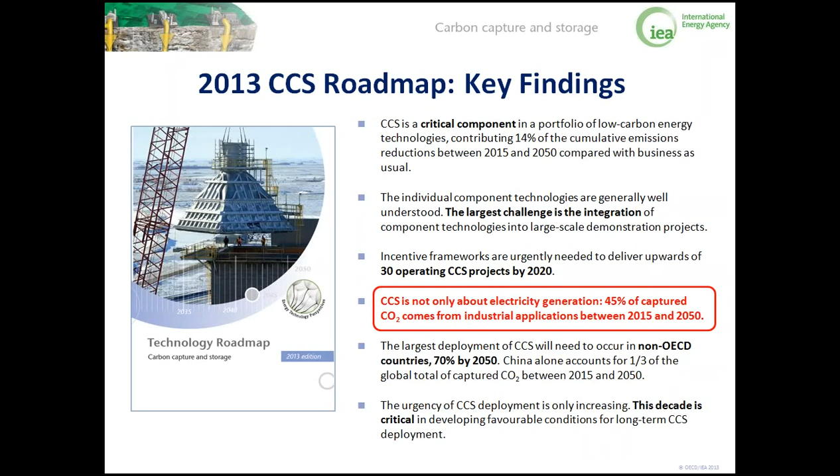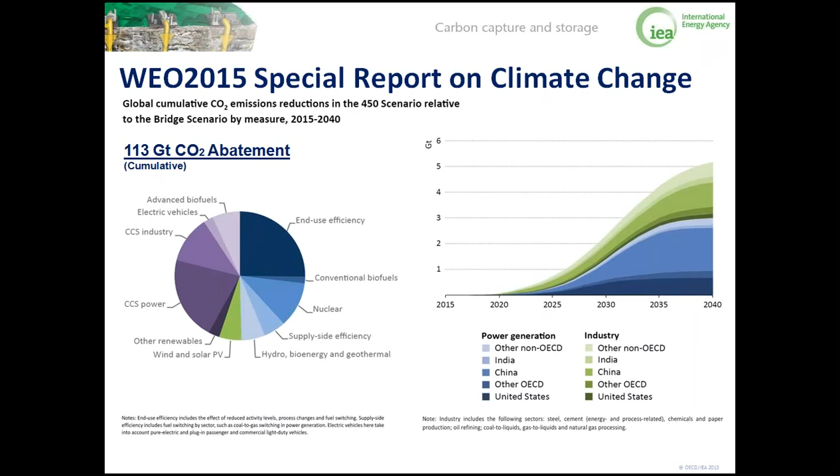Without the initiative of China, CCS in industry will not run for sure. We all know that in the steel industry, the cement industry, or the oil refining sector, China accounts for between 40 to 50 or even 60% of the total capacity in these areas. So this slide clearly highlights the important role of CCS in developing countries.

To achieve the 450 ppm scenario by 2050 and beyond, there are currently no alternatives to reach the same level of emission reduction as what CCS could do. There is a limitation to fuel switching, and a limitation for energy efficiency measures. The lack of CCS would probably lead to other sectors carrying the burden.

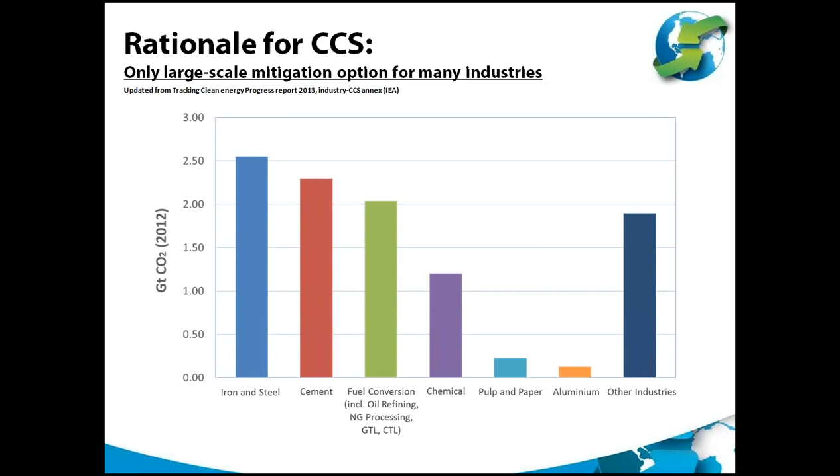I would like to present some of the key results of the steel industry. Then I will follow this up with an overview of the results of the hydrogen production industrial application.

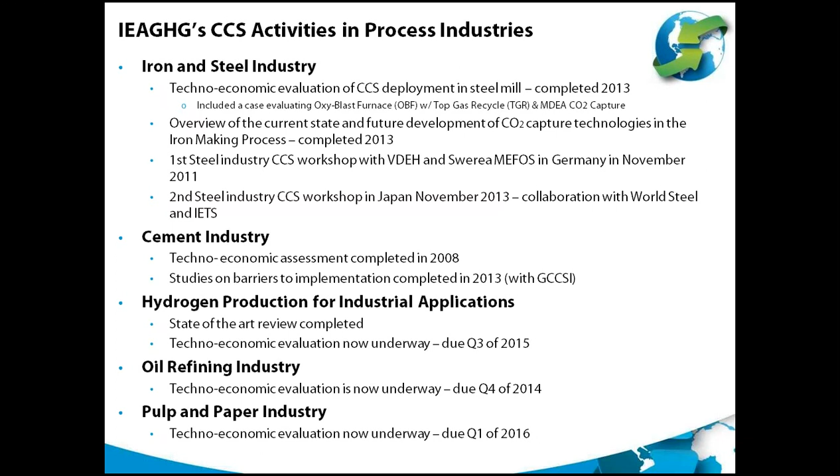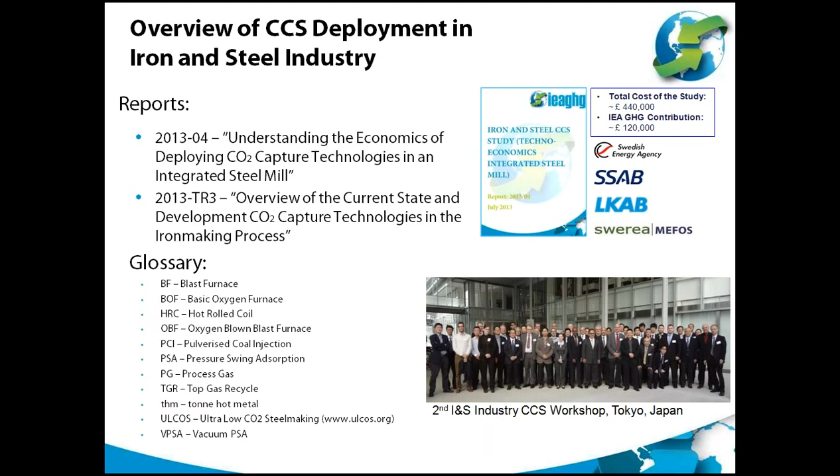You can also see in this slide the different lists of glossaries or lists of abbreviations that I use in this presentation.

This is an example of an integrated steel mill. This is not the same production steel route that we see in Emirates Steel, where the first CCS deployment in the steel industry will be operational by 2016. So I would like to re-emphasize this type of steel mill is not the same type of steel mill that we will see the first deployment of CCS.

What I would like to emphasize here is that this production route consists of nearly 74% of the production of steel in the world. This production route consists of raw material preparation, which includes the coke plant, the lime kiln, and the sinter plant; the iron making facility, which consists of the blast furnaces; the steel making facility, which consists of the BOF shops; and the different finishing mills, which consist of hot rolling, cold rolling, annealing lines, etc.

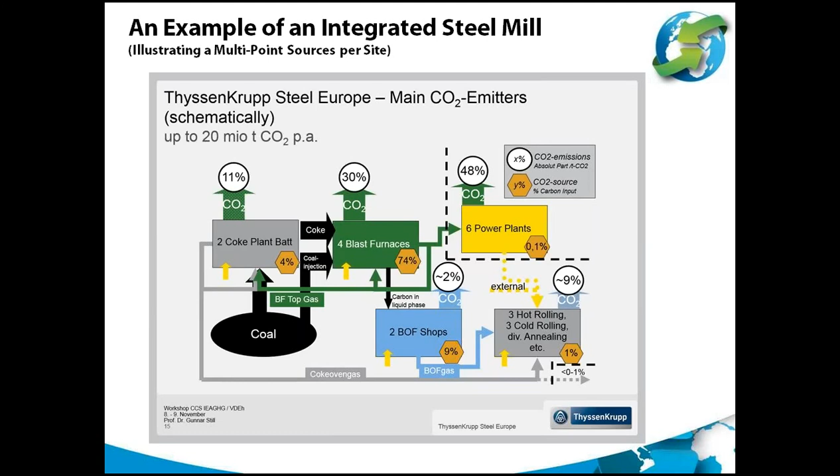This slide clearly indicates that in an integrated steel mill, it is a multi-point source emission. The numbers in the yellow hexagon shapes indicate the percent of carbon responsible for the total CO2 emission, while the numbers in the circles indicate where the CO2 will be emitted. You can clearly see that around 75% of the carbon input to the whole steel mill goes through the different blast furnaces, while most of the CO2 emissions, particularly from users of the blast furnace gas, occur at points such as the power plants, which account for 48% of the total CO2 emission.

My next slide shows an overview of the ULCOS program. This program, ULCOS, is the research program for the European Steel Community to develop breakthrough technologies that could reduce nearly 50% of the CO2 emissions from the steelmaking processes. Three out of the four technologies selected require CCS to achieve such reduction.

I would also like to highlight the different programs in Course 50 in Japan and the different program in POSCO RIST, which I have no time to present today. However, I would like to emphasize the key learnings we got while doing the studies for the steel industry.

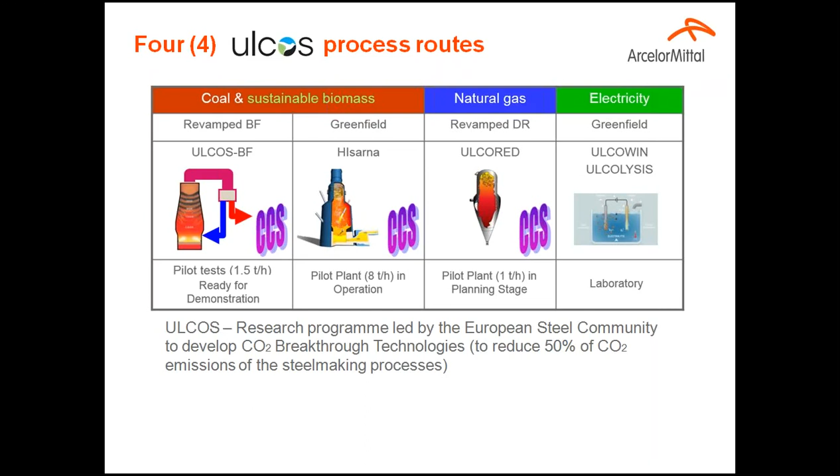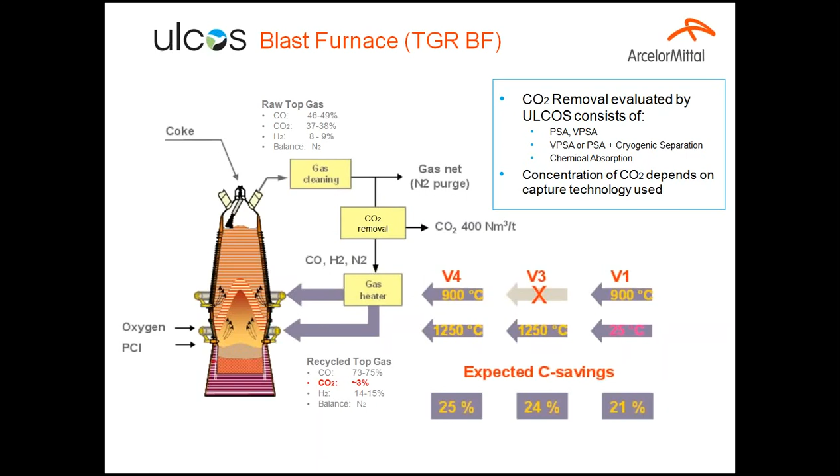However, both demonstration plants didn't proceed, primarily for various reasons: partly economics, partly political, and partly technical. What I would also like to emphasize here is that by recycling the top gas, you could achieve between 20 to 25% carbon input reduction, or carbon savings. This will definitely translate to about 30 to 35% coke consumption reduction. So to demonstrate this concept, I would like to present this slide indicating how the carbon input looks like in a blast furnace.

Clearly, the carbon input into the blast furnace consists of the coke input and the PCI coal input, which pretty much covers nearly 95-97% of the total carbon input.

As I mentioned a while ago, nearly 80 to 90% of the total carbon input to the whole steel mill goes through this process. However, emissions within this process will only be coming from the flare of the blast furnace iron making process or from

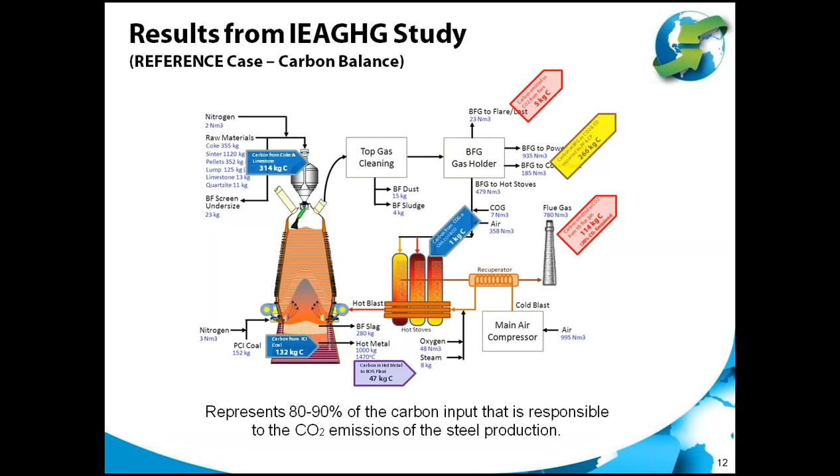the flue gas of the hot stove. The rest of the carbon will go through as blast furnace gas or will remain in the liquid steel and eventually will become basic oxygen furnace gas.

This is a case study where we evaluated the costs of deploying CO2 capture with breakthrough technologies. This is not similar to what ULCOS has evaluated, but it is very similar to the variant of version 1.

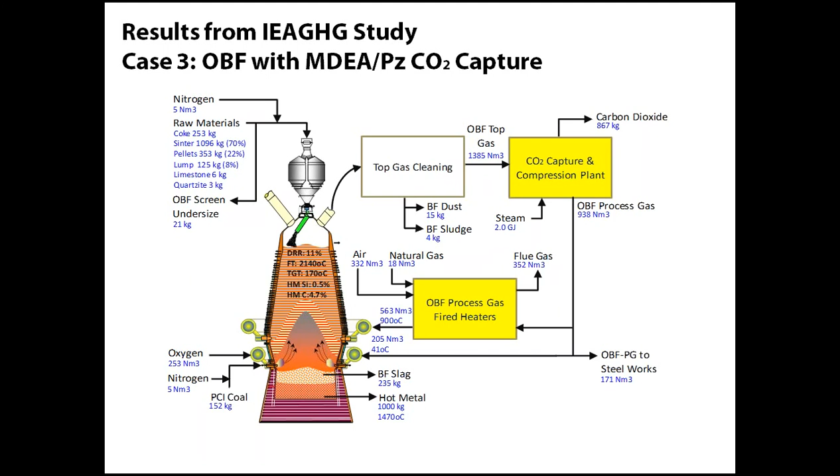In this process, we make use of an MDEA/Pz solvent to capture CO2 from the top gas. We recycled nearly 80% of the top gas to the blast furnace. This is pretty much the results of our study.

We can clearly see that once we employ CO2 capture within the steel mill, we will change the profile of CO2 emissions of the plant. What's important in this slide is that from the conventional plant, we have an input of around 448 kilogram per ton of hot metal.

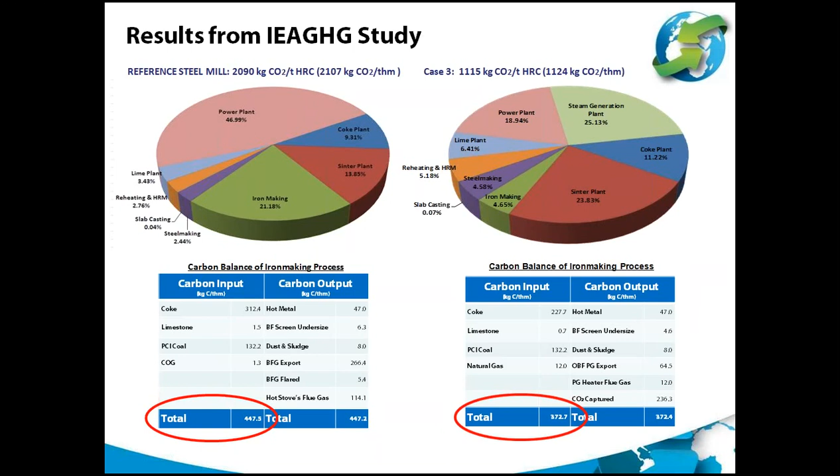However, once we deployed CCS with top gas recycle, we have reduced the carbon input down to 373 kilogram per ton of hot metal.

This is very important. As we have reduced the carbon input to the blast furnace, it also affected, or has a very sensitive relation to the coking coal price.

Once we reduce the carbon input to the blast furnace, we also reduce the amount of coke needed for the blast furnace, making it very sensitive to the CO2 avoidance costs. Once the coking coal price increases, we also reduce the CO2 avoidance costs of the steel mill with CCS.

Please note that this cost only considered the CO2 capture part without considering transport and storage. If you consider transport and storage, you'll expect additional reduction since you are trying to transport much less CO2 as compared to conventional technology.

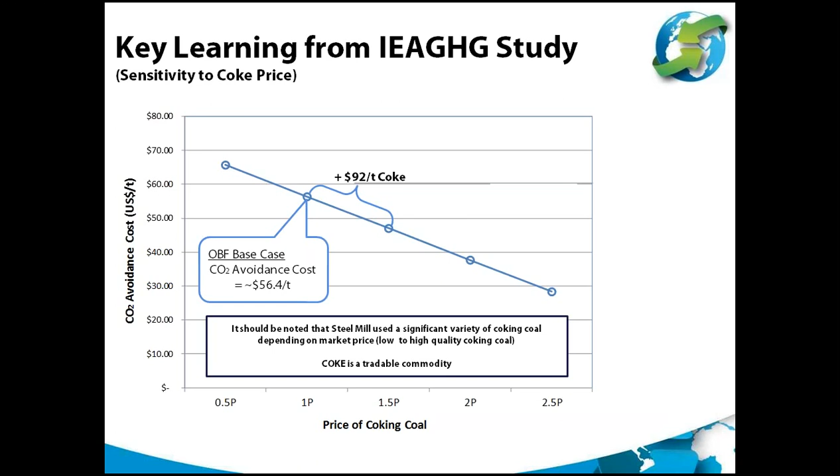So I will go to my next couple of slides looking at the second studies related to hydrogen and oil refining sector. We've been concurrently doing two studies: one looking at the cost of CO2 capture in a hydrogen plant connected to an industrial complex, and the second one is an oil refinery where we worked together with Gassnova, Concawe, and Sintef.

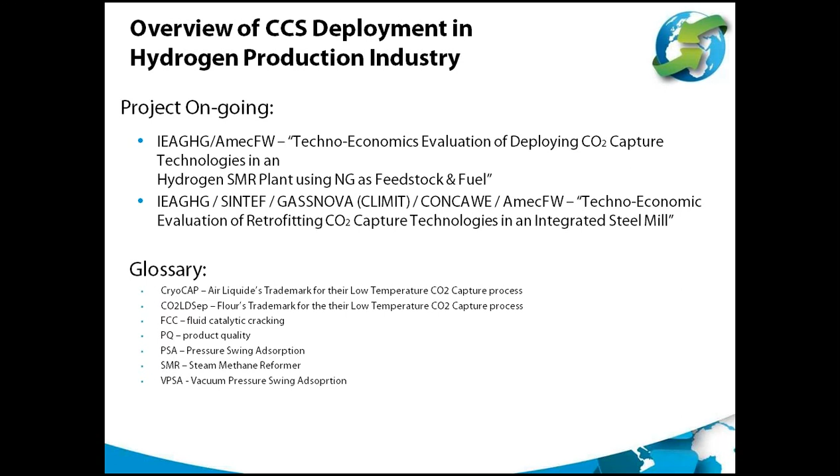Hydrogen used in industry could be in the form of high purity hydrogen or could be a mixture of hydrogen and carbon monoxide. It is a key raw material for a lot of processes, mainly for ammonia, for methanol, and also an important ingredient for the oil refining sector.

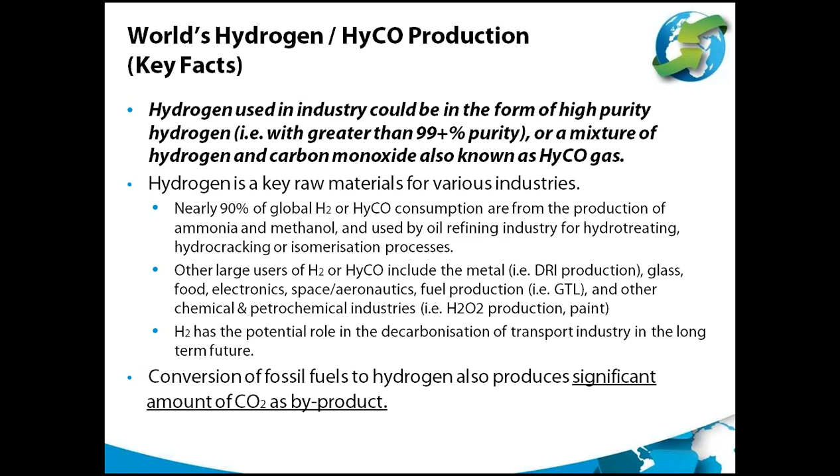This tail gas is used as the main fuel for the reformer, and once you burn this fuel, this will end up in the flue gas that will contain about 19 to 20% CO2.

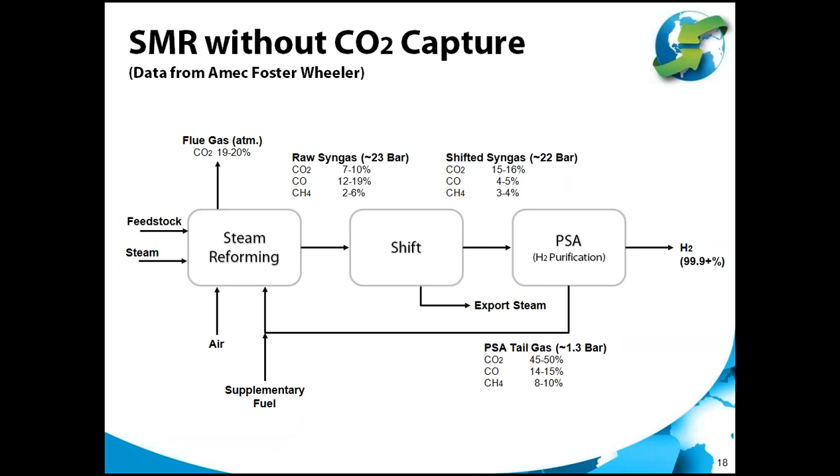To capture CO2 in a modern SMR, you have three possible options. You have an option to capture CO2 just after the shift reactor, an option to capture the CO2 just after the tail gas, and an option to capture CO2 just

after the flue gas. For options 1 and 2, typical capture rate will be in the region of about 50 to 60%. For option 3, a capture rate of 90% is possible. However, by replacing this supplementary fuel with hydrogen-rich fuel, you can further slightly increase the capture rate by about 10%.

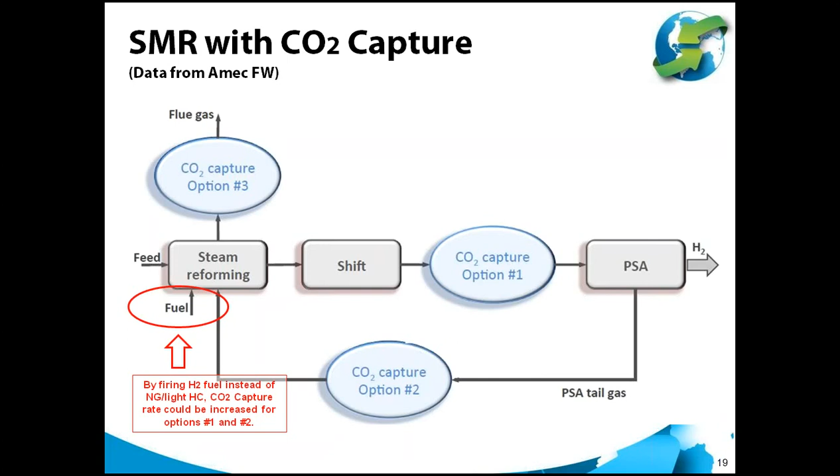There are several technologies available for capturing CO2 in option 1, option 2, and option 3. For option 1, you can consider chemical absorption, for example amine or Benfield processes. Similarly, you can also capture CO2 by the use of PSA, VPSA, or membrane.

For option 2, chemical absorption could be used, low pressure adsorbent, even low temperature CO2 capture is possible. And for option 3, chemical absorption is probably the only choice, unless you have operated a hybrid system.

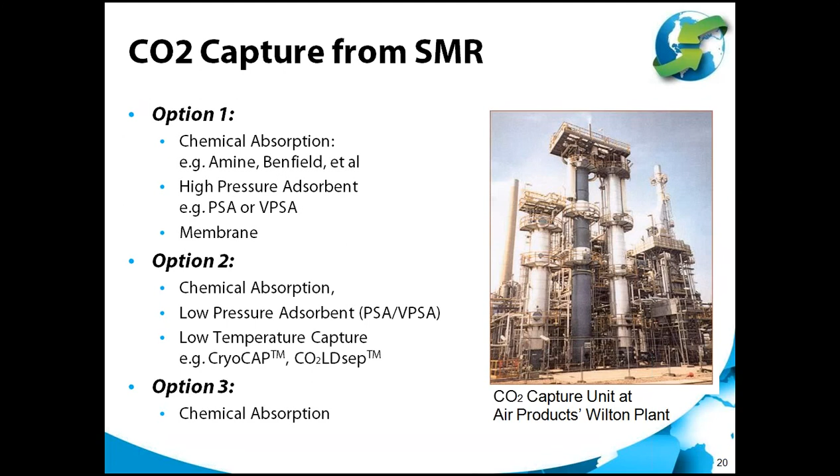The picture clearly shows here that CO2 capture in an SMR is not new. This is an SMR in the Wilton plant of Air Products, which captures nearly 100% of the CO2 from the syngas of the SMR.

I would like to highlight here that the capture of CO2 integrated to transport and storage is right now being demonstrated. We have two large-scale demo plants. These include the Port Arthur project, which is now operational, which captures CO2 from two trains of SMR using VPSA technology.

It is important to emphasize that for the project to go ahead, you require about $400 million from US DOE as support.

The second large demonstration project is the Quest project in Canada, which is now under construction and probably in commissioning now. It also captures 1 million tons of CO2 from three trains of SMR, and the CO2 captured from this SMR is transported by pipeline 65 kilometers north of the facility into a saline aquifer.

There are two large-scale pilot plants. An exception to the rule here is Air Liquide Port Jerome, where CO2 is captured using new or breakthrough technology like the Cryocap technology, using a low temperature process which utilizes the CO2 for the food grade market.

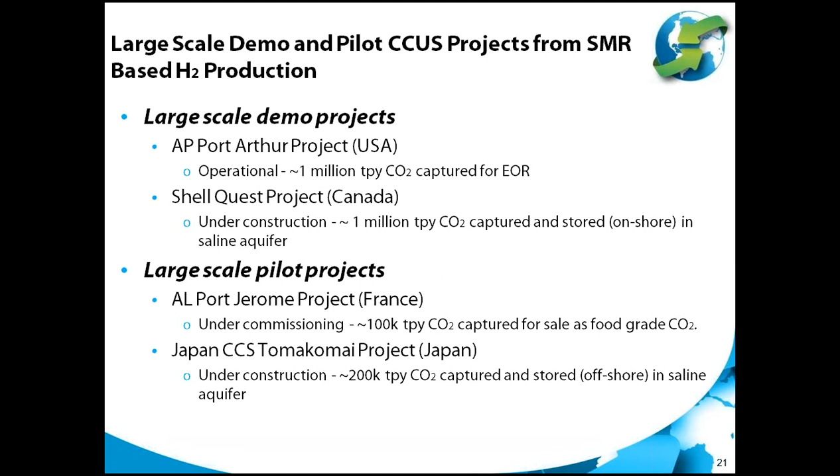So just to give you a conclusion for this section: capture of CO2 from SMR is not new. This is considered a low-hanging fruit, but not cheap.

Large-scale demonstration of integrating CO2 capture with transport and storage is now ongoing. This has been achieved, and we should expect more of these projects.

For example, the projects in Canada, like the Agrium project and the Sturgeon Refinery project, will also capture CO2 from hydrogen production plants. Development of new technologies is ongoing, aimed at reducing costs.

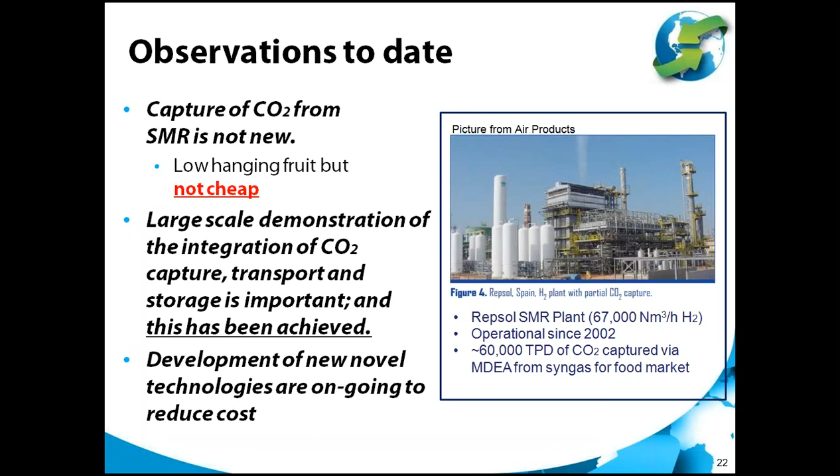So this is pretty much the summary of what I would like to present about capturing CO2 from an SMR. So what is the importance of this technology to be used in other industries, like the oil refining industry?

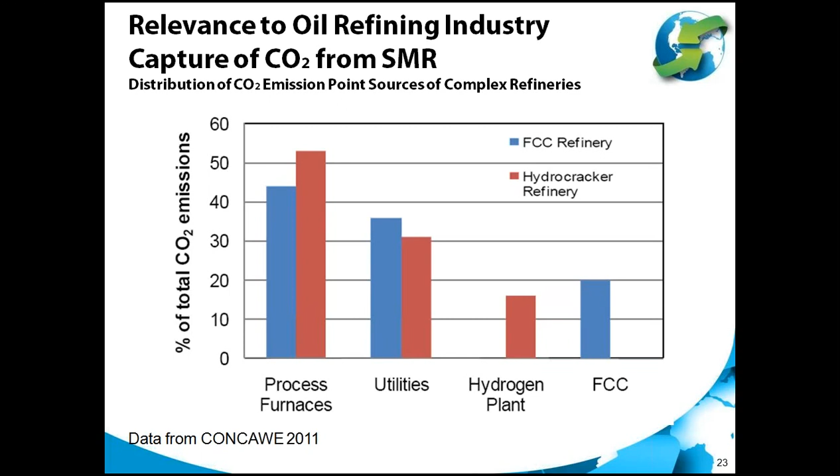But in the future, we should expect demand for more stringent product quality, or lower sulfur content, in diesel, gasoline, and marine fuel. With this increasing stringency in quality demand, you should expect a higher demand for hydrogen.

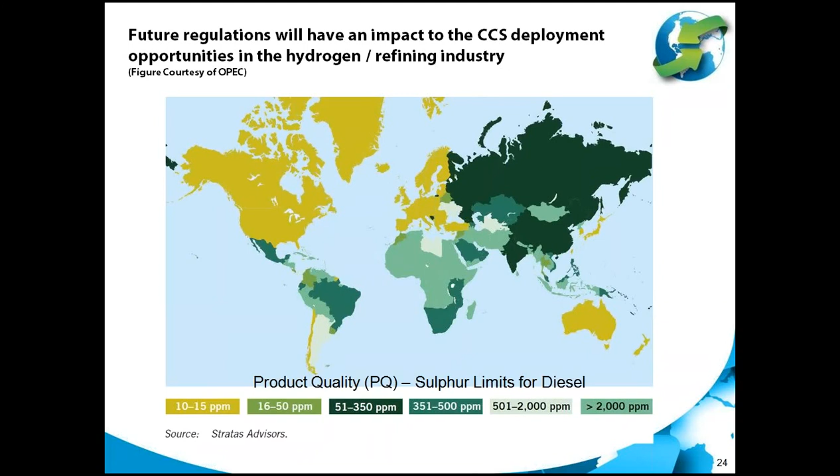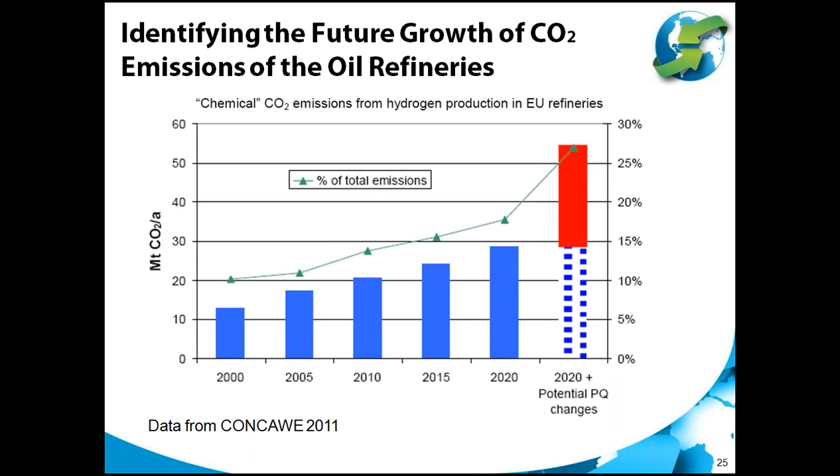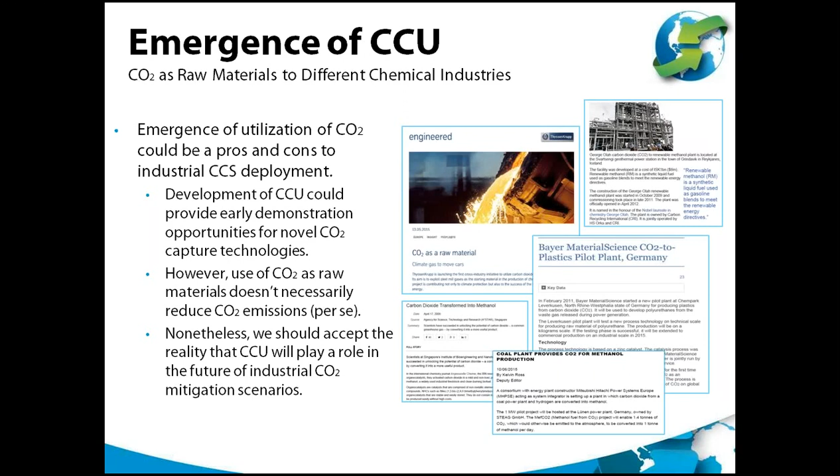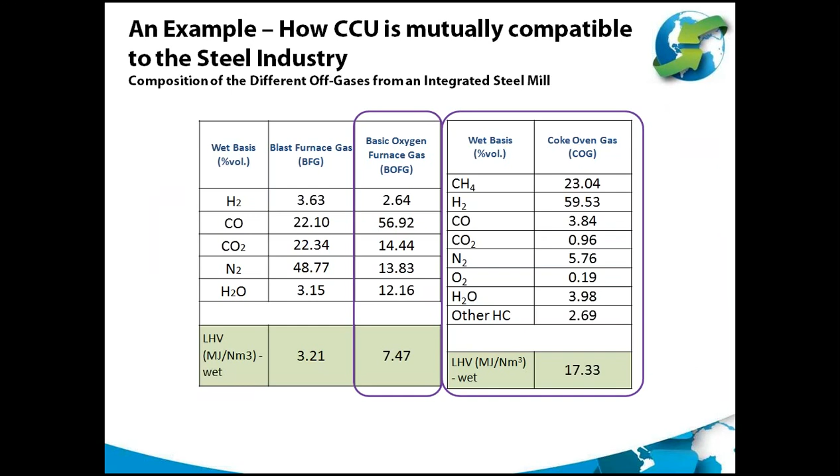This is showing an example where off gases from the steel mill, typical off gases from basic oxygen furnaces and coke oven gas, are used to produce methanol. What I'd like to highlight here is that once we deploy breakthrough technologies for CO2 in the steel industry, it will provide more gas that could be a good raw material to produce chemicals.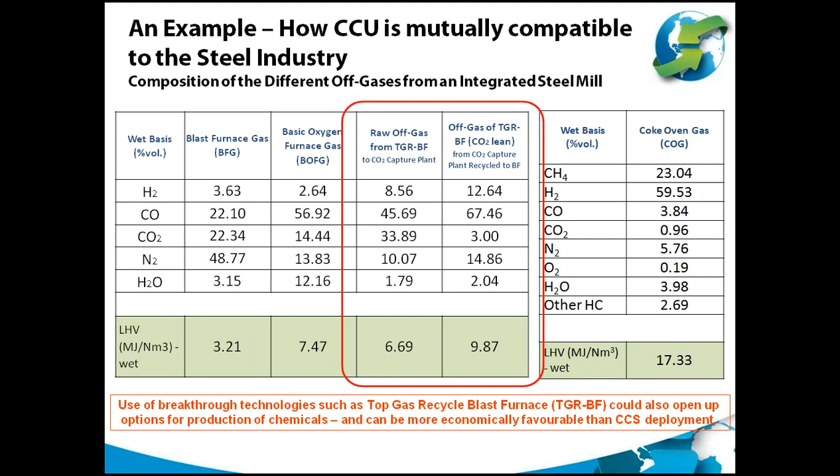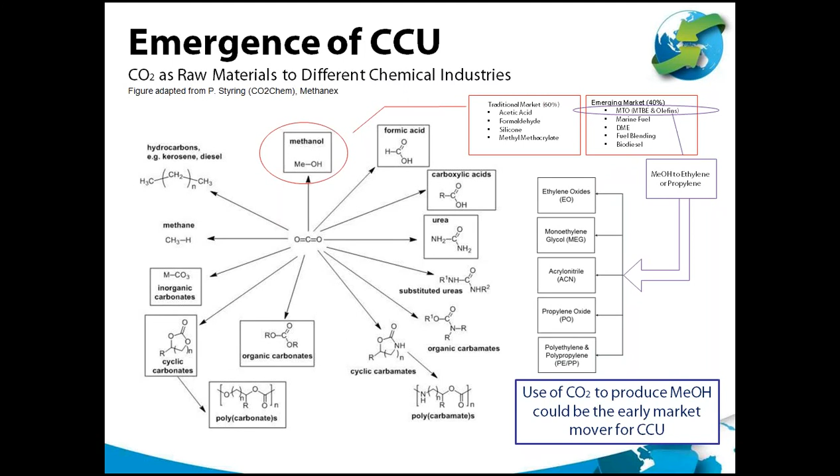But what I'd like to highlight here is that using CO2 to produce methanol for fuel could not reduce CO2 per se, and this could be a potential form of technical carbon leakage. This is just transferring the emissions of CO2 from the production site, like a steel mill, to the user of methanol, such as cars or other users.

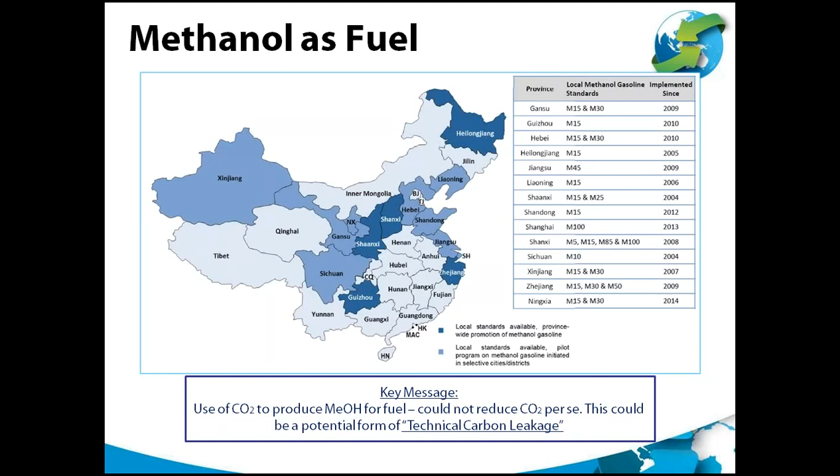What we are afraid of is economic CO2 leakage. We need to have a balance, a worldwide policy development for CO2 reduction based on both CCU and CCS. Early deployment is expected in some industries. I've demonstrated this in the Port Arthur project, and I've illustrated this in other SMR projects.

We should expect two additional projects in the coming year in Canada. This is pretty much funded with the support of the government, at the same time with a simpler supplier-client structure.

Now, when dealing with CCS in the steel industry or cement industry, where production facilities could be moved to other countries with no stringent policy on CO2 reduction, this would consist of economic CO2 leakage. This is something that will become a main barrier to deploying CCS in the industry.